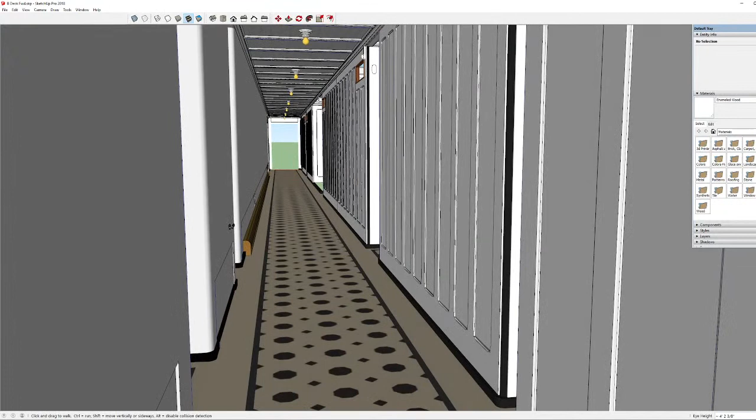One second. One second. I want to play my other music. I like to do this now. So, accordion. That was really loud. Okay. Hello again. I don't know if I have music playing in the background like last time. I'm gonna try because that was fun for me.

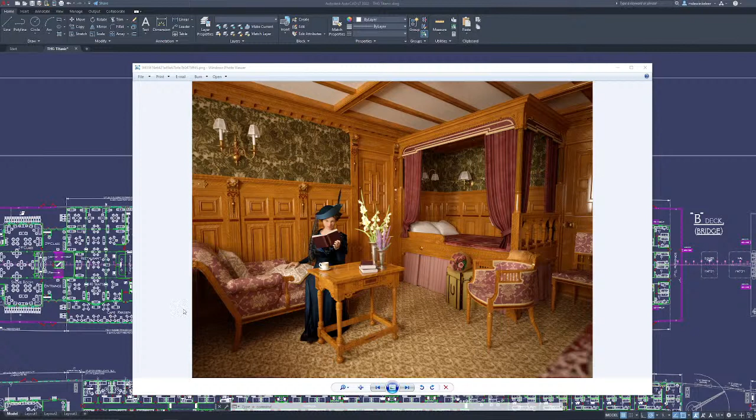And the things that Geo renders, which are amazing, if I could find at least one of them. Come on now! Well, this one I've shared a bunch of times. So this is B59. I don't like this song, I'm gonna skip it. This cabin is B59, the Old Dutch cabin. We've already changed some of the textures on the wall, but this is what Geo models. He models all these period cabins. He does the fancy things.

The point I'm trying to get to is that today I'm going to be working on these basic boring cabins. If you're a patron, sorry guys, you've seen me work on these before, and I'm just gonna make sure that they're pretty much ready to go, because the rest of the team is getting the forecastle and well deck all set. The files are going to be transferred to our drive from the modeling side to the engine side from all the modelers.

The scenes are set up to be given to Derek Vavir, who's the Unreal programmer. So everything here in the forecastle and the well deck area, I'm highlighting it like this, is going to be put into the engine soon and made to be interactive. And the next thing to be modeled is everything in this section right here. I'll zoom in a bit so you can see it's all these basic cabins.

And I think this is when the snowball effect is going to begin, because this is the area where you have the basic cabins, and these basic cabins and basic corridors are all the same. They're not like these fancy cabins that Geo makes. They're not a bunch of different styles. They're not Old Dutch versus Modern Dutch versus French versus Georgian styles in white or dark woods. They're just basic paneling, done this way throughout the entire ship, with the same furniture.

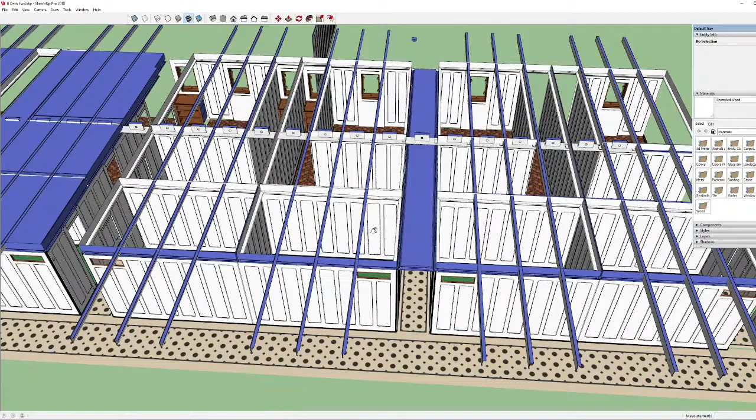So don't look at it like this. This is the basic SketchUp, awful looking, bare bones minimalist. This is as nasty as you can get. But this is what I have just to aid in planning it all out. So there's absolutely nothing nice about it.

Then there's Geo's version. Now I could basically do this too, where we render something to see what it will look like. Geo models his work for the sake of rendering. He uses SketchUp as well, and he renders it before it goes into Unreal, so that we can make sure that the textures match photographs.

So when he rendered this cabin, he then converted it to black and white, and we compared it with the black and white photo to see how closely it resembles it. And then we find some differences to try to modify the textures on the wall, the silk on the wall, for instance.

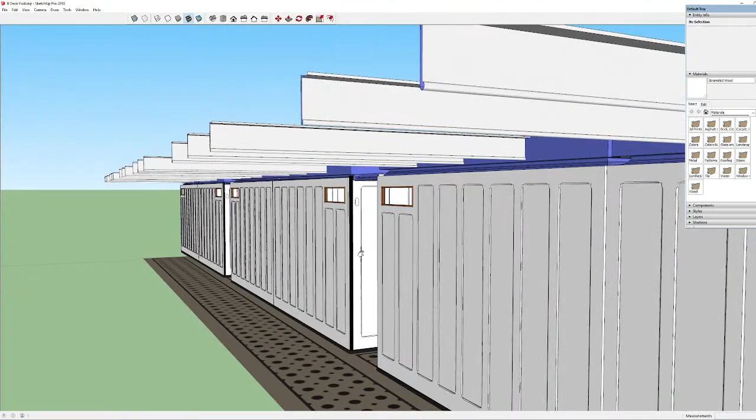So to answer the question, the lights right here are all done in the Unreal Engine. And coming out at the end of the year or beginning of next year, I'm not sure exactly when, is something everybody is talking about: Unreal Engine 5, which is going to allow us to put more detail into things. That has allowed me to get back into the picture with modeling some things, because if you joined the stream on Saturday, I was talking about how I am currently in the modeling program called SketchUp, and the majority of the team uses Maya.

Maya is what's utilized for transferring models to the game engine, Unreal Engine. Usually what has to happen to convert my models to the game engine is Kyle would take my models, put them into Maya after a conversion process, and then he would clean up my models, remove a lot of superfluous triangles and errors that would pop up in the conversion process, and get them ready to go. That process is probably still going to happen regardless, for optimization purposes. The same is going to happen with Geo's models.

When you see these renders right here, they're done for the purpose of rendering this lovely image. For instance, you see this inlaid design here on the table. You have the darker woods along the medium woods. The same with this little darker inlay here. I'm not saying anything negative about Geo's work because I do the exact same thing. Geo probably has modeled this into the wood itself with two different textures, but when we create the UV maps of the models, we wouldn't have to create lines. Let me demonstrate what he probably did.

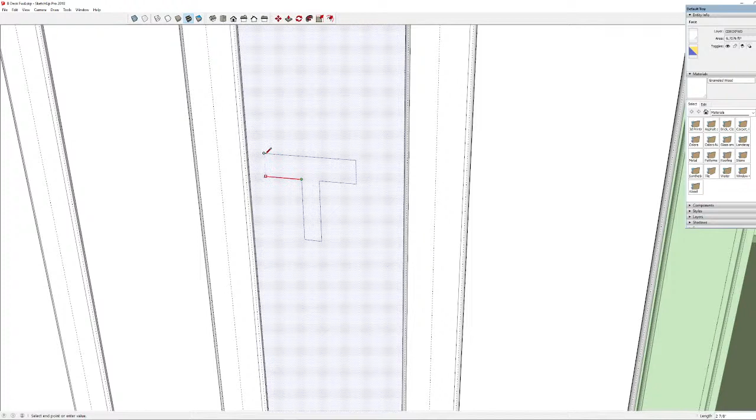What I would do is create that line right here. Imagine you want to write the T in Titanic. This is what we would do in SketchUp, and then we would color it in like that. But that's not technically the correct thing. We'd have to create it in the texture itself; this entire panel is one texture, and the T in Titanic would be part of the texture file. So SketchUp is not the best method for texturing. That's one of the downsides. So it's a good question.

There's a lot to go on, but what I'm doing today is checking the B deck forward area, because that's what's next after everything here. Like I said, all this is getting turned in, and the process is ahead for enginizing it finally, and they want to make sure that it gets correct for the alpha release, and then the next alpha release is beginning with these corridors and cabins. People are gonna get really bored with these cabins, since everything looks pretty much the same.

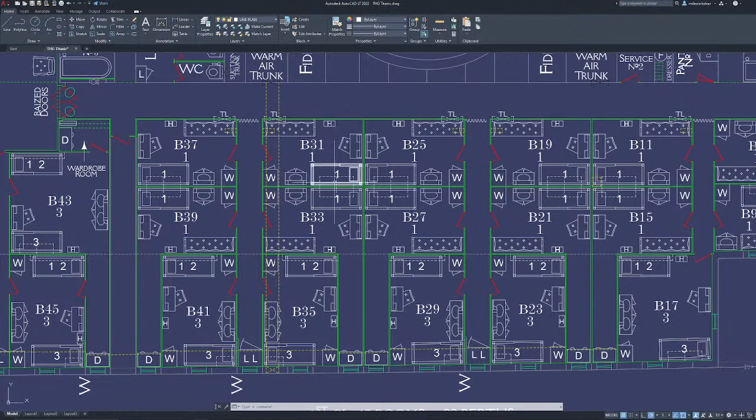If you can see here, Titanic has some really fabulous spaces, but they have a lot of repeating areas. So you have cabins here which are just wooden beds or brass beds, and they're all the same. They're all just white walls, and then you have cabins that are just green carpets or sometimes red carpets. So it's nothing that fancy, and they're just going to repeat constantly. Let me get into this and tell you what I'm doing. I got back into adding some more detail because I was able to do so because of Unreal 5.

I'm going to go into the chat quickly. I see carpet questions, which I like to answer, because we argue in our private research Discord about carpets. "I'm confused about carpet colors in the forward B-deck cabins. I hear they're either blue or green." Well, they're definitely green, and I believe this leafy color still. There are some blue ones that I have, but I'm not sure if we're keeping them or not. There's this blue carpet pattern, which we're using in places, which is different than the other carpet pattern, which you could recognize from Titanic, which comes in green and red.

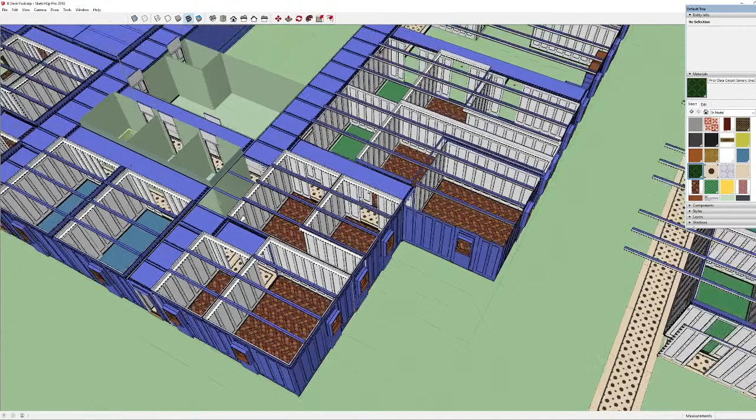I think I actually have it here. I'm gonna color it in really quickly. This one, which is a piece of it, is saved from Titanic supposedly. You can see it's different a little bit. You gotta look fast. And it's not made up, it's based off of another ship. That information for blue carpets comes from Britannic's specification guide, I think. It's always a back and forth with carpet colors, and sometimes beds. There's always a debate about which type of brass bed was used where. Is this one? This one I have to do.

Because there's several types of brass beds on Titanic. Okay, here's the new method for these panels. For a while, these panels were the bane of my existence, and I wish Kyle was here. We were always trying to find a method for them. They're going to be all over the ship. You've already seen them in some of the demos, and they're everywhere.

They're even in James Cameron's movie Titanic. You saw them in the Scotland Road, for example. But we have to find a good method for creating them. I thought at first we'd use a texture, but luckily Unreal Engine 5's coming out. So the best method is making them.

Kyle's bailing because he had to have his sleep. Hang on one second, let me just make sure by trying to text him. I'm pretty sure he's asleep. I'll give it to him.

But the best method for making these wall panels is to make them just like the real-life wall panels. Now, one interesting thing is you can see the dimensions for these wall panels, if you were here last time, in the ship joinery PDF that I sent a link to, which of course I won't be able to find off the top of my head. Maybe I can. Archive.org, and I'm gonna quickly find ship joinery.

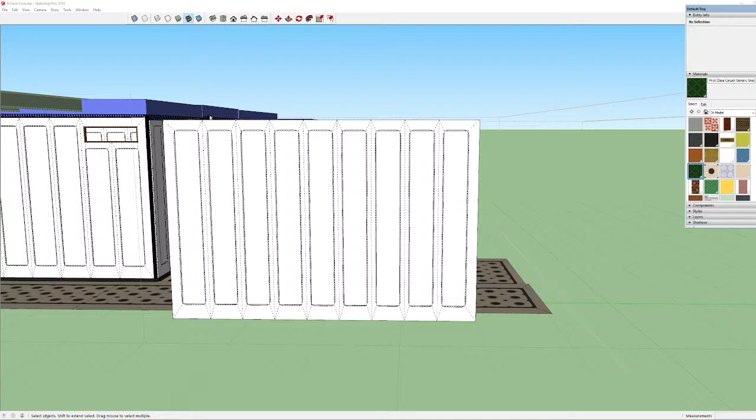There's also a page of it in Ship Joinery by Duckworth. So now we're going to the research side. Well, I almost opened right to it. There it is. That's what's all over the ship. This is what we're working with right here. So let's zoom in. I already have this, but I'm gonna show you guys. This is your basic bulkhead framing. If you want to learn anything else about it, here's how they did it. 5-ply wood, I guess.

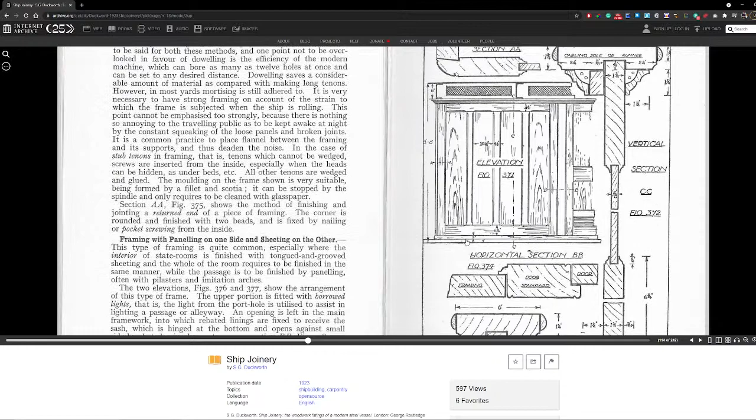This type of framing is quite common, especially where the interior of staterooms is finished with tongue and grooved sheeting, and the whole of the room requires to be finished in the same manner, while the passage is to be finished by paneling, often with pilasters and imitation arches. Oh, I turned the page. That sounds more like the fancy midships corridors. Figures 376 and 377. I haven't actually read this in a while.

Okay, I want us to be reading about figure 372. To complete the cornice, a nosing piece is planted on the runner. See section 372. Simple framing, that's what we're talking about. The piece of frame shown in elevation is figure 371. 375, 374, 372. That's the section. Well, it doesn't matter. The point is, we have this right here. More French. I'm sorry, I can't read French.

How is the deck pitch being modeled? SketchUp model looks flat. I believe you mean the shear of the ship, right here. Bevels for fore and aft framing. The curvature of the ship, the shear, which we are taking into account finally, because for the integration of the exterior it's vitally important, and Kyle's rather adamant about it, so it's going to occur.

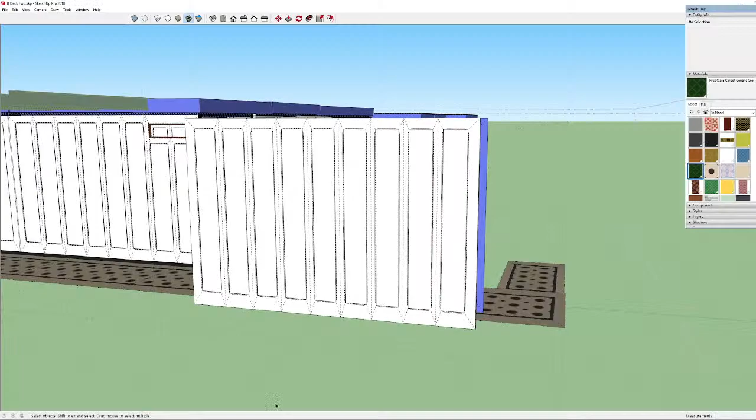So what's going to happen is, for the interiors that I create, such as these simple walls here, once they get handed over to somebody in Maya, and if you've watched one of Dominic's streams, he has made the entire deck plates using the iron plans, and he did them flat at first, and then he's going to add the shear to those, and then the shear is added to these panels.

Because everything is somewhat in Maya, it's much easier to do than it is in SketchUp, or so Kyle has told me. It can be done in simple areas. Now there are areas of the ship where the shear is less noticeable, and it's not really going to be done, such as amidships.

But if you're in the forward part of the bow, for example, that whole area has to be modeled with shear, such as under the forecastle deck. I'll scroll up here instead. This area here, you can tell, has extreme shear. It is an extreme angle, so it can't be modeled totally flat, as you can see right here. While there's certain other areas which are relatively level, such as amidships.

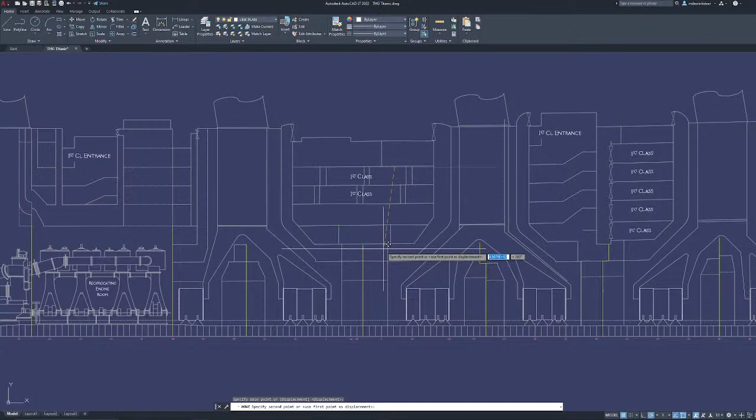As you can see, it's difficult to tell that there's hardly any shear, especially the lower you get amidships. That's why there is actually shear in our Scotland Road model, but because it's so low on the ship and it's amidships... this is E-deck right here. You can see this is the beginning of Scotland Road, basically right here. This is the middle of Scotland Road right here. Is this E-deck? D-deck? Yes.

Using just these plans that I made, you can see how minimal shear is. You only see shear really in long spaces anyway. That's one of the reasons why for a while I kept saying you don't need shear. If you're standing in the corridor of the Queen Mary, for instance, you can see shear in that ship. This is shear right here.

I don't know why there's a picture of like the Hindenburg over here, because this is airships.net. That's not the Hindenburg, but yeah, this is shear, and Titanic wouldn't have as extreme shear as this, we've all talked about, so we don't have to worry.

But we're not going to be adding shear to every cabin, because cabins are going to be just... Do I have a cabin that I can demonstrate this with? I haven't modeled a single thing I've talked about, but I think this one? No. Oh, maybe the old model.

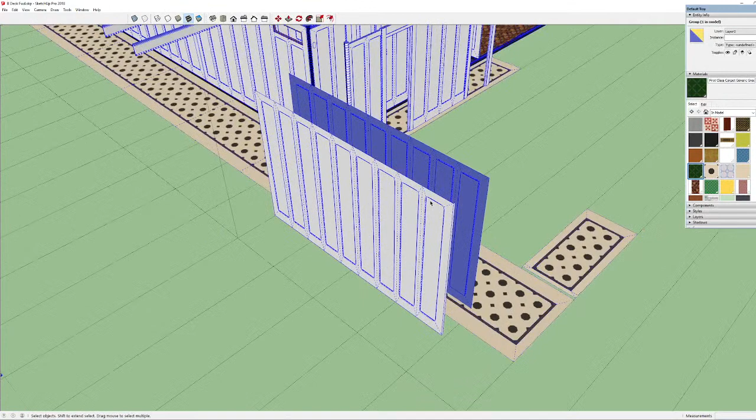So individual cabins will basically be picked up, and I think this is what we discussed about it. A cabin will be picked up and moved to fit with the shear. So things will be staggered to go with the shear that fits the corridor or the hull, unless it's an extreme case like underneath the forecastle or poop deck. So there's definitely shear involved with the plan. So now let me go back to this and explain what I'm about to do to fix this panel.

So the best way to fix these, which I've already fixed a lot of them, is to actually make them as if they are the real wall pieces, where we have wood on either side, because that's how they're done. Because you have a piece of wood, and you have thinner pieces. If you imagine a door frame, you have a rail and stiles, because that's what this is.

How did the carpet attach to the floor? asked Dark Moon 3D. Was there wooden flooring between it and the metal decking? The carpet was laid on the Litosilo. The Litosilo is the underlying material that was laid on top of the steel deck, and it was somewhat a new material. It's kind of like a plastic that was poured down onto the steel deck, and it was held in with clips that were bolted to the steel.

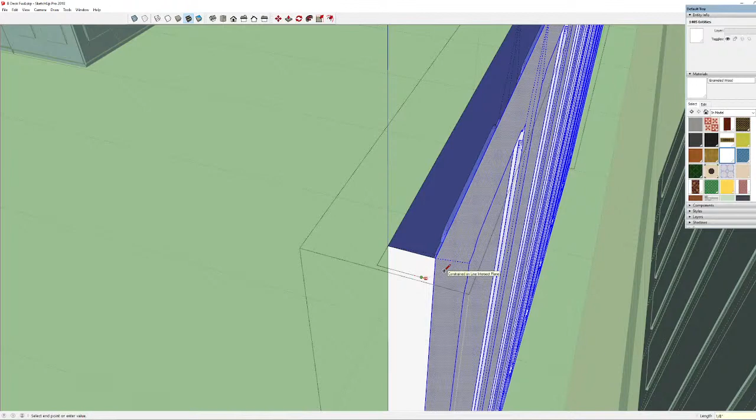So it seems to me that the carpet was more or less, and maybe if Kyle was here he could correct me on this, because he did a lot of research on Litosilo. He made some cutaways on Litosilo and carpeting. The carpeting seems to be just placed on. It might be stapled or nailed to the Litosilo in the corners, but you can see photographs of carpeting on Titanic, and it honestly doesn't look like it was put on in the best fashion.

In photographs of cabin B58, which is the Louis the 16th style cabin, you can see the carpeting kind of bunched up, and the room is mostly complete, or so they say, and that's why I believe that the carpeting was just placed, and that was considered finished.

This is a thin wall. This wall is an inch and a quarter. So to put that into perspective, it's thinner than my index finger and my middle finger, right there.

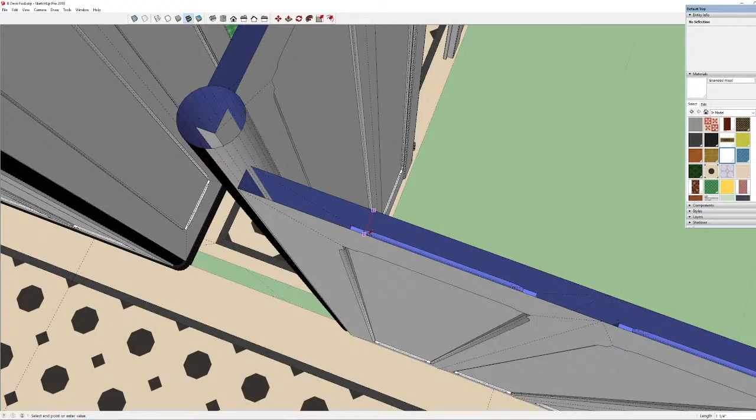And something is wrong. I gotta change it. I'm glad I realized it now. It should be the midpoint, and it's not in the midpoint. But I'll change it after I put that there. 15 feet. These should be the same. I'll show you with these over here.

Is there a door in that one? Yes, okay. So usually what I do is I take already finished components, bring them over, and then I change them up to be the next component I need until I build up. But if I already have something done, I'm not going to bother with it.

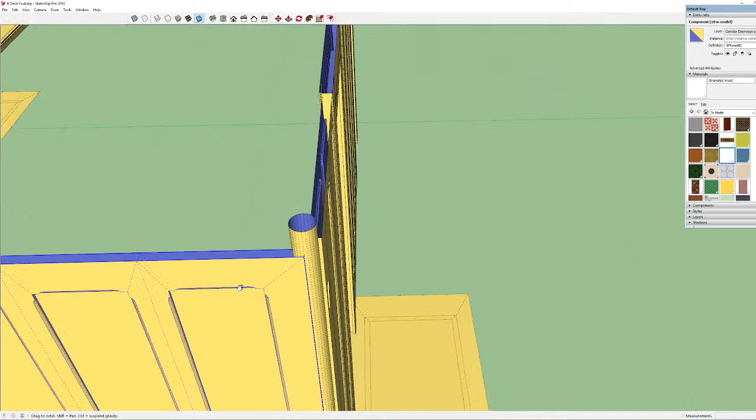We need to increase these panels by 2.5. Luckily I have a cheat sheet right here. Oh, I don't need the cheat sheet right here. But I can still do some math time. I've got 1, 2, 3, 4, 5, 6, 7, 8, 9 panels. Take this line, divide it by 9. You're going to see the insanity. Okay, a little under a fourth of an inch. Go in, take it all, and move it over by a fourth.

So the reason why I put off doing all these walls and why it takes forever is because, and I call these corridors and these panelings and these cabins the bane of my existence, it's just repetition and tedious work of doing it again and again and again,

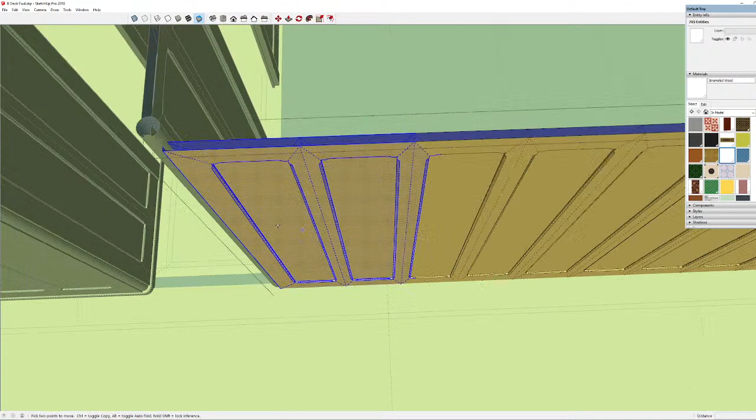and I don't know how the shop workers in Harland and Wolff and the joiners and the carpenters and everybody, I mean, I guess they were getting paid for this, but I can't believe that they did this. I imagine some of them did it on site on the ship to get things to fit perfectly, and I know for a fact that some things didn't fit perfectly on ship, and they had to, for lack of a better phrase, jerry-rig things to fit.

So there, that makes me more happy. What? Oh, I see. My thing's not even in the right spot anymore. Okay, that's better. Yeah, now that looks better. This needs to come over. Why aren't you in the model? What are you doing to me? You're giving me a hard time.

This is a deck cant, which I changed again because I realized that the deck cant has a cut through for the doors, which makes total sense, but I didn't notice it. Kyle noticed it. He's not here, but he noticed it. The deck cants are cut through for the doors to swing through. Of course they did, and of course Kyle noticed it. I didn't notice it, but what are you gonna do? Kyle's a genius.

What do I want to divide this by? 6. Not divide by, subtract by 6. I did it! I did math perfectly! Okay. And then I don't want to divide it by anything, I just want to move it over. Okay. Half the time I talk to you.

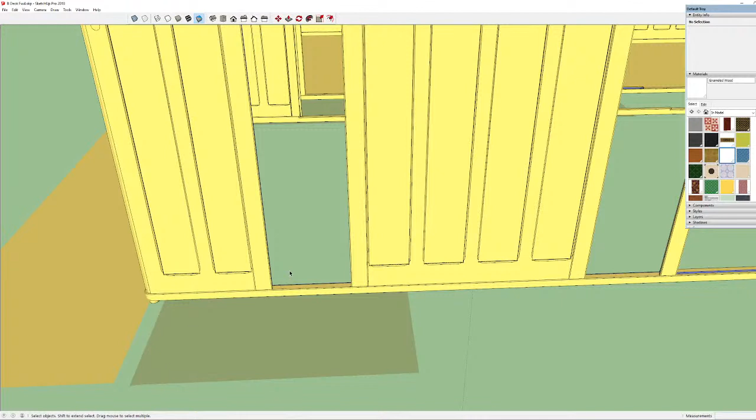Why do I use SketchUp? This is what I've come to learn and love and just be good with, and I stick with it, and I suck at everything else. So there's always been arguments to make me go to a different program, and it doesn't seem like it's worth the effort. I mean, not worth the effort, but it's tough to.

I don't do enough of the modeling these days. I do like basic modeling. I consider this basic modeling. I can do the setting up of where cabins and walls go and easy areas. I consider this easy areas. But for instance, Geo's already done these, but if I had to make the furniture for the private promenade, I would not be the one to do it, because I don't think SketchUp would be the best way to do it, and I would not be comfortable doing it.

I always say that I have a problem with doing curves and organic shapes, and furniture. And furniture often has organic shapes in Titanic's furniture, when you have curves of the legs on furniture and chairs, and not simple curves like on a round table. But do I have a Geo thing still up? Yes. Like scary, very scary.

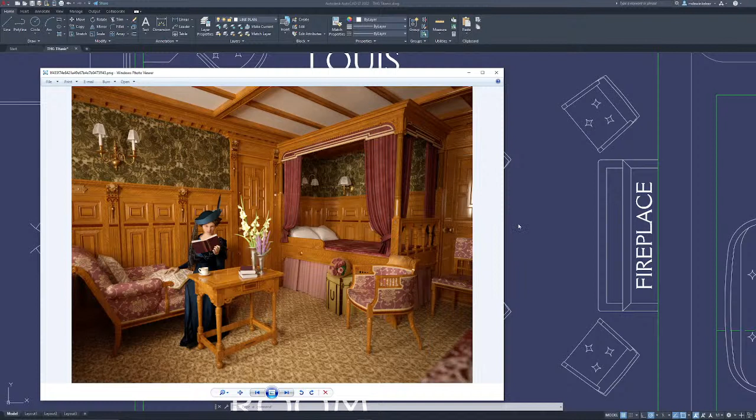There's a lot that's going to have to be changed for his models before they get put into the engine as well, and that's just an understanding. And that's before they go into Unreal Engine 5, which we're gonna go to, which someone asked as well.

And Titanic had watertight doors, which were vertical sliding doors. I believe her watertight doors counted to number 20. I think she had 25. I don't want to give everything away. 33. Why did I say 25? So she had 33 watertight doors. They were numbered on the ship.

So they were vertical sliding. They're horizontal and vertical. The majority were horizontal. There were only 12 that were vertically sliding. Sorry. The reason why I made these plans is so I could go to them quickly and be able to tell everybody information. And that's what I have it for.

Do you use the models for renders or from renders? We use the models to make renders, and then we're going to use the renders of the interiors to show everybody basically what the spaces need to look like in the engine. So when Derek gets to the interior of those first class rooms, Geo doesn't need to be there the entire time, telling him, make the lighting look this certain way.

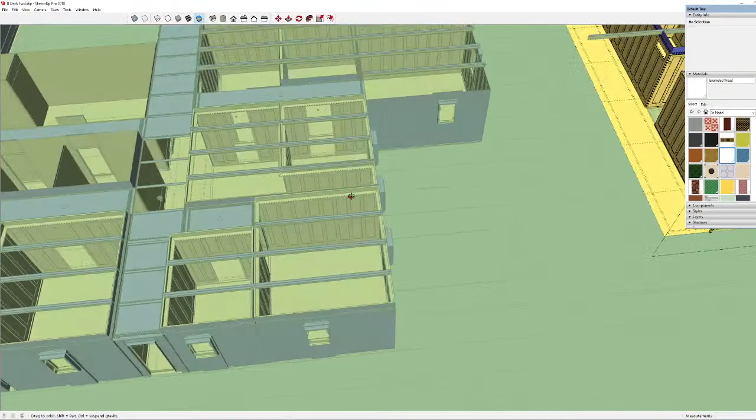We can just have the render already, and Derek can then try to make it match the render. That's why we have it. It's basically what I call a pre-visualization of what the space needs to look like. And that's not the right panel, I think. Oh, this one doesn't need a door. Well, I'll just make this unique.

I saw another question. How do you make sure your work doesn't get lost? Well, one of the things that we pay for is a cloud. I just got lost right there. We have a Google Drive for everything that we have, and we have model backups, research backups, plan backups, as many backups as possible. So we have it on our Google Workspace. So that's something we have.

And Jesse, thank you so much. "Looking good, Matt. Keep up the great work on the legendary ship." We're all trying our best. It's not just me. So yes, thank you, Jesse. We are. Excuse me as I take off my glasses and rub my eyes for a moment.

We have a lot of people doing a lot on this, and I'm gonna make this unique. No, I'm gonna actually delete that. I forgot. This needs to be completely. Oh, this already is unique. I need to do this.

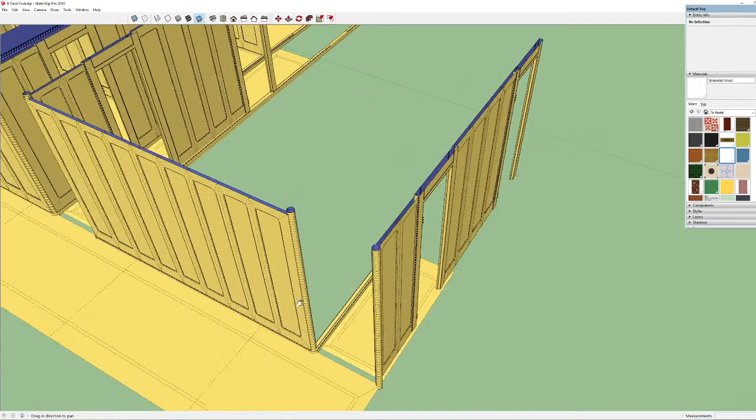Was James Cameron ever a part of the conversation back when you were looking for investors? Did you guys try reaching out to him? Did he respond? Did Bill mention anything about it to him? Is he aware of it? That's a loaded question, but there are some things that I can say and some things that I can't say.

I can say that yes, James Cameron is aware of Titanic Honor and Glory. James Cameron has seen Titanic Honor and Glory's videos. Dang it, I did it again. He's seen the real-time sinking. What else has he seen? He's seen the Britannic real-time sinking. He's seen the reception room flooding. He's commented on it. We've read his comments about it.

We've worked with him vicariously. Well, not vicariously. I mean, we have worked with him a few times to supply his documentary with the 20-year. What the heck was it called? James Cameron Goes Back to Titanic, and this is his second final word on the matter. I just raised my hands in the air like Dr. Zoidberg during that moment, because we provided footage for that documentary.

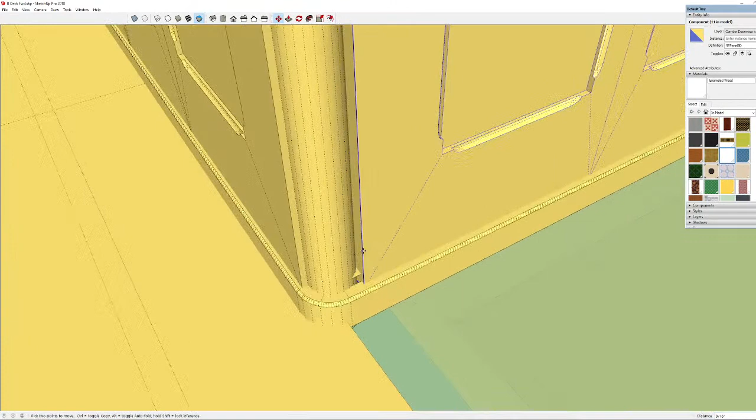And there was also an exhibition at the, what was it called? The Reagan Center. This is wrong. Hang on. There's an exhibition at the Reagan Library, excuse me, the Reagan Presidential Library in California. And it featured some of the ROV footage that he shot from the Turkish bath and the Marconi room, and we matched the footage that he took with our spaces, and it was presented alongside his ROV footage at the exhibition.

I think it still happens. I think it went to Washington D.C., I believe. And so you could look at Cameron's ROV footage, and then you could look to the right next to it, and you can see the footage sync up with the Honor and Glory footage that Kyle recorded, basically. So yeah, he knows about it, but there's a lot going on with all parties.

For one thing, James Cameron is busy doing James Cameron things, including Avatar 2, 3, 4, 5, 6. You gotta let him do what he's gotta do. You can't force people to invest, regardless of how interested they are in a subject. But yeah, it's cool enough that they know about it, or they talked about it, and they commented on it.

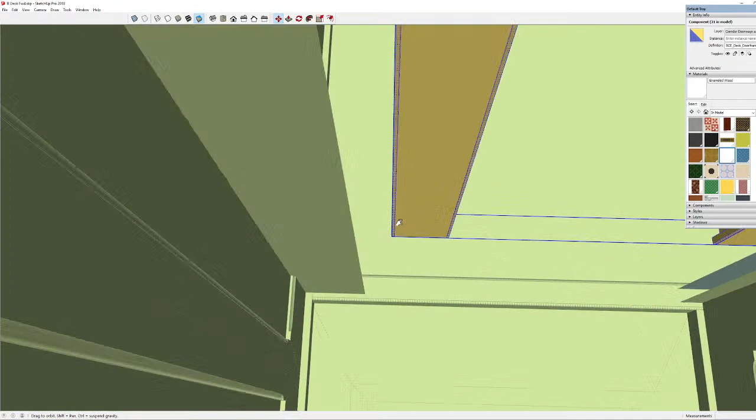I rewatched the movie in full the other night while I was working. Oh, I need to bring over just a door frame. Because I want to make a Titanic University video, spoiler alert, with something about the movie. I don't want to give anything else away, but I've always had appreciation for the movie. I don't want to ever bash the movie as some people do. It still holds up, and I still think it's spectacular, and he put his heart and soul into it. Excuse me, it's been a long day.

I don't own a TV, but yeah. Let's see. I'm only reading. There's a lot going on, but I only watch streams. I was watching someone's stream before I came on, and I was thinking, she's got all her streaming stuff in order. No wonder James was stressed.

So yeah. A 1/16 of an inch. Are you kidding me? Okay. I remade my door frames too, so I gotta. Oh wait, it's 50 feet and 6. Watch the door frame. Watch it. Okay. When I redid my door jambs, I redid my door frames. That's my most correct door frame so far. Kyle better not change it, saying, it's not as accurate as I would make it, I want to make it more accurate. And then I'll be like, okay, Kyle, go ahead. That was my Kyle impression, don't tell him I did that.

So, here we go. Let's see. Now I gotta look at my own plans right now. Zoom out. Zoom in. Luckily this was all spoiled already, I'm not worried about that. Big copyright notice. Okay. That goes right to the hull. Yes. At least I made Zeno laugh. Okay.

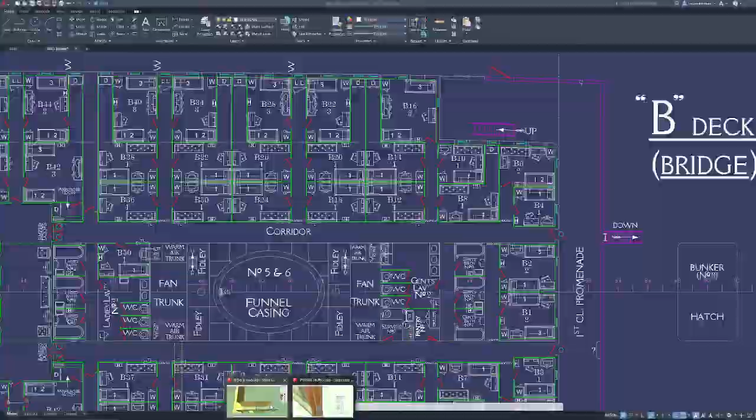I could have looked. I could have looked at my own model, which is what I'm doing. Nobody tell him. I forgot. Okay, 50 feet. 50.5 feet. So yeah, we're still... That's very interesting. We're just going over.

I'm prepping all these damn walls. I don't want to, but I have to, because we're getting there. I haven't finished these plans yet. That's the thing. As you can see right here, I got stuff floating on the side. I got engines that are unfinished. I got crap down here. I got empty linen rooms. I got missing stuff. I gotta finish some stuff.

And once I do finish these things, I do plan on having these be for sale. And I think people will appreciate them. So yeah, I'm hoping that I can finish them in time for the holiday season. The holiday season, everybody. That's my goal. So yes, where are we?

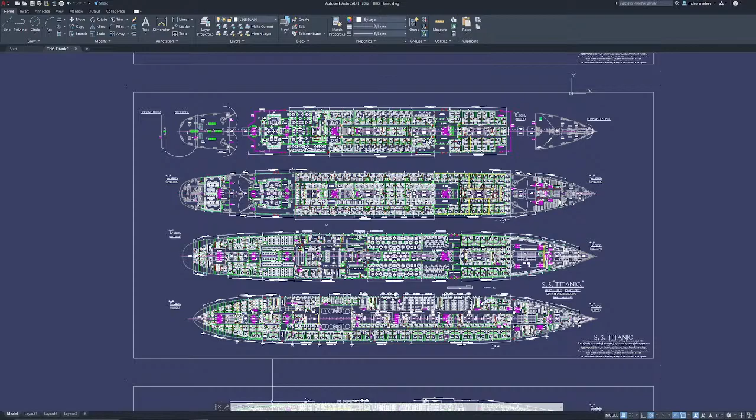It won't be as detailed as this. There's going to be hidden... There are some things that are just for reference. They're not going to be super sized, because they're going to be printed at 1/200th scale, and if they're digital, they're going to be also that scale. So you can't zoom in. I'm not sure yet. Where are we? I lost my place.

Oh, very good. Oh, this is a 13 panel wall. I don't have a 13 panel wall yet. This is a 9 panel, right? 1, 2, 3, 4, 5, 6, 7, 8, 9. Yeah. I guess I'll just convert this one to be a 9 panel wall. Oh, this is a 9 panel. The 13 panel, this one. Okay, this one's easy. This one I'm gonna keep as is.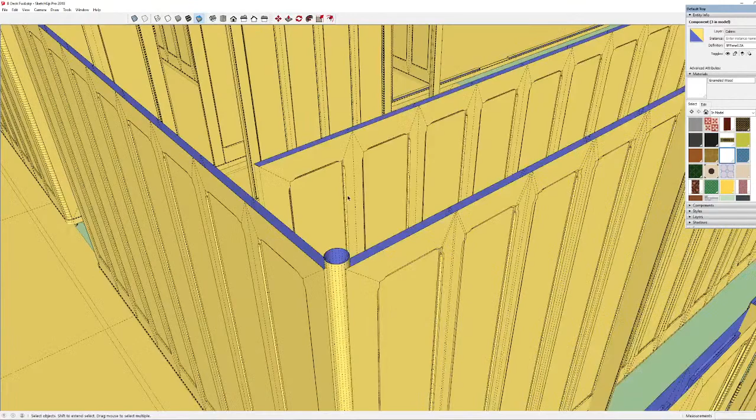In the alpha, you will not be able to go to the boat deck. Will you see the boat deck? I think you will be able... Technically, no. No, you won't. I don't think you'll be able to see the boat deck. That's the best way I can put it. You will be able to look up to where the boat deck is, but you won't see the boat deck yet.

There's some things that we are planning for. Remember, Titanic will be sitting in Belfast in this alpha, just like in Demo 3. But it takes place before Demo 3. That's all I'll say. So there's an interesting timeline.

Will there be multiplayer in THG? That's very expensive. Everybody needs to give a lot more super chats, buy a lot more ships, and we need to have a lot more patrons, because multiplayer involves servers and lots of things. I wish, it'd be fun. Oh, Shane, thank you. I'll read yours in a second.

But there is a Titanic... What is that Titanic multiplayer experience that's been around for like 10 years now, that you can just explore and have fun with? Oh gosh. Oh, it was so much fun. What was it? If someone can remind me. It was a very simple model of Titanic, and that's why you were able to do it. But yeah, Shane, thank you.

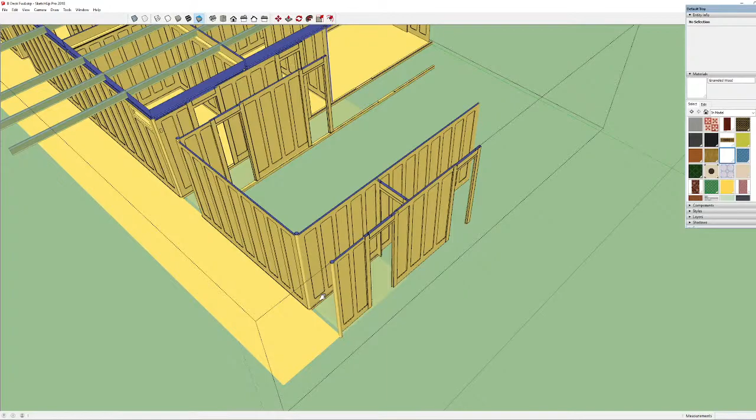Eager to explore all these boring cabins that looked more or less the same in the alpha. Does the forward B deck section contain a stewardess room? No, it doesn't. The forward B deck does not contain a stewardess room. They gave it a cabin. This is usually where a stewardess cabin would be.

I think it was Titanic Chat. I think Jimmy's right. Titanic Chat or Titanic Voyage or something. Roblox was not around yet. It was like an RPG or something. But it eventually could sink. And one time there was a bunch of people there.

Yeah, this is where they would have a stewardess cabin on A deck. But on B deck, they made it into an inner cabin. So it was a very interesting place. Very tight spot. A stewardess's cabin would be more or less the same as one of these cabins, paneling wise. I forget if the auction catalog said it had carpeting or not. Some had carpeting, I think, like the nicer ones on C deck. C deck was considered the nicest deck.

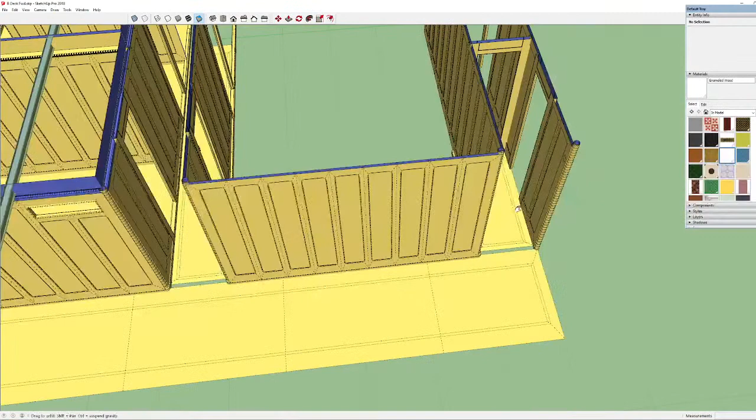Some stewardesses had heaters on C deck because, like I said, C deck is the wealthiest deck. Even on Titanic, even though they had the cabins which extended to the outboard of the ship, C deck is the nicest deck, I guess you could say. The crew there were treated as nicely as the rest of the passengers. That's where the maids and valets saloon is. The barbershop's there.

That's where the fanciest cabins were, as stated today in the critically acclaimed video, Titanic's fanciest cabin. Just kidding. Let's see. Oh, this could make me mad. That could make me mad.

15 feet. Yeah, well, I made it work with that one. Let's see.

Will these plans you're working on be given away to patrons? I have considered giving away test prints to patrons. I did a while ago, actually, in the beginning, give A5 size papers to certain patrons. The ones that had the prints, I printed out basically on just printer paper, little snippets of the plans when

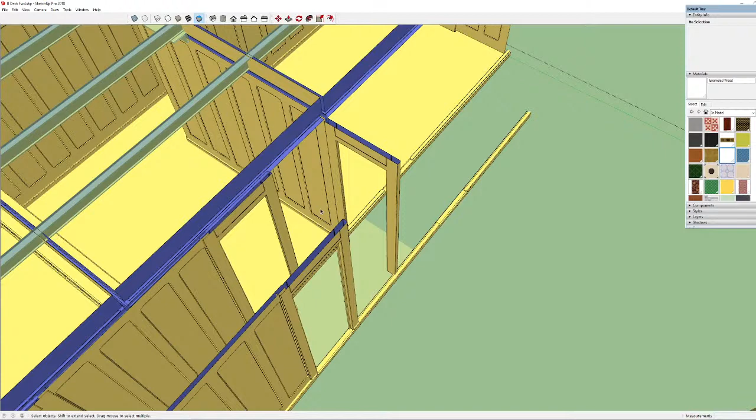I was printing areas to see what it would look like, the line weights, and see if I added too much detail that would be printed or not. And when I sent out 8.5 by 11 prints to people, one month I sent that with them as well, and I had some feedback that it was fun.

Matt, how did you measure all the first class areas in C deck? I want to make an interior scale model. It's very difficult. I'm gonna get into a long ramble about that. Let me scroll out to C deck, for instance. So how do you measure all the areas on C deck?

Well, it starts with the... Do I have it available? I'm gonna hide everything, but turn off the current layer. Watch this. Line text. No doors. No dash lines. None of that. Okay, we'll keep that.

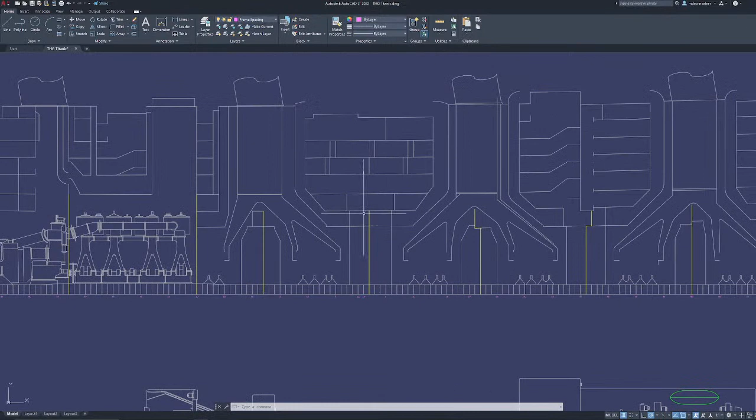And they start directly in the middle of the ship, right here, with 1A and 1F. 1A stands for 1 aft, 1F stands for 1 forward, and they work all their way to as far forward and as far aft as there were frames. And there was a certain distance between them, and that's how I measure the ship.

Most plans tell them, even modern plans. Bruce Beveridge's plan says it. I make sure that my plan will say that. They say the average distance between each frame is 36 inches or 3 feet. So basing it off of that, you can look at any other plan and measure rough estimates to see that certain areas were 9 feet or 3 frames wide, or a single bathroom, for instance, was roughly 3 feet wide.

Let's go to C deck and give you a better example. Unless you want to get really detailed and go to the source. I'm going to give you a website. You can go to the National Museums of Northern Ireland, go to their collections, and get the iron plans of Titanic. As many as they have, they don't have all of them. We're still missing some of the ship.

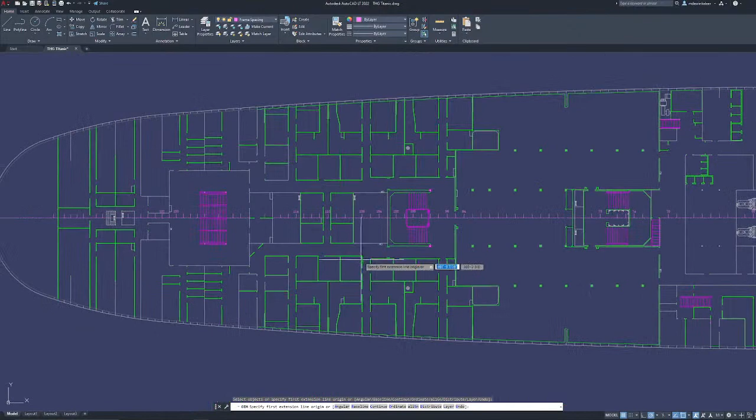This looks fun like this. I can show you what this ship looks like, because this is not showing any detail, or at least it's showing detail that I don't mind showing, because it's just where the walls are. And you can get the iron plans of the ship, and you can try to desperately interpret those to make your deck plans. I'll open up the B deck iron plan, because we're working on B deck so much.

So this is fun to read. This is B deck's iron plan right here, and as you can see, I already have a headache just looking at it, because it's always quite awful. And so this is what you have to work with. And of course, it doesn't show you where cabins are.

It just shows you where the ironwork is. And here you can see where all the beams are, these dashed lines, and it shows you the length of the beams and the number. So there's two beams that make up this long length right here that goes across. You have two of them, and they're 35 feet 2 inches.

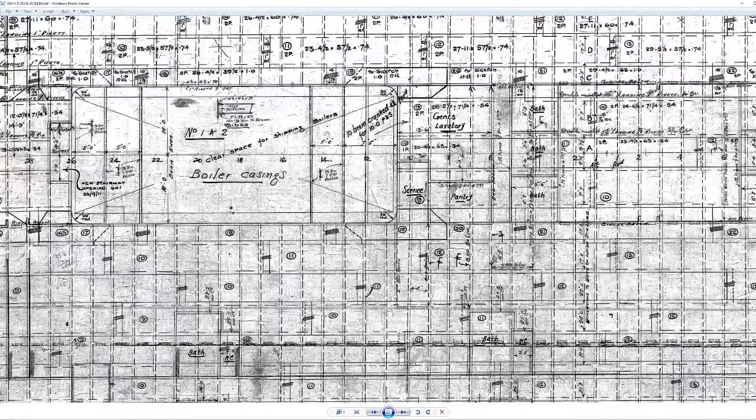It just goes right to here, I'm sorry, because obviously there's a web below. I got to make sure I got that, and then you have 20 feet right here. So if you add 35 feet 2 inches plus 35 feet 2 inches, because you have two of them, 35 and 35 is 70, right? And then you add the 20 feet, which we know we have right here, 10 feet plus 10 feet.

So that's 35 plus 35 plus 10 plus 10. That's 70 plus 20, which is 90. So you can see right here that B deck is 90 feet 4 inches wide. So it's fun to read their measurements and how they did it. You can see that you have one long beam right here where there's no casing, and you got one that's 90 feet 3.5.

And you have that for most of the ship here. You got an 89. You see where the ship is slowly starting to taper in towards the bow right here, because you got 90 feet 3.5, and you suddenly got 89 feet and a half. And then you got 90, well, I guess it tapers back out. I don't know. Very confusing.

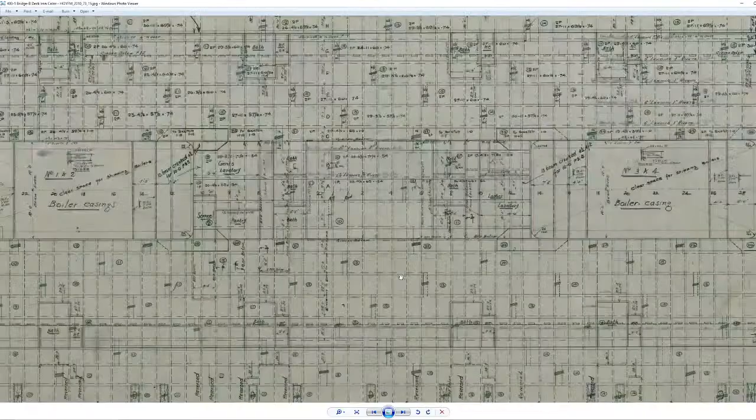There's all sorts of details that you gotta be able to interpret. Like right here, here's a note that's specifically for Titanic, I guess, versus Olympic. Beam knees, 72 plates, 80. Because you see 401. It'd be good if this was in color, and here's a better version of the plan. If it was in color, then we'd be able to read the changes in the notes.

So yes, you can see here's blue. So these plans aren't just in black and white; they're in color when you get them. Like this one right here. Look at these windows. They painted the windows.

Someone on the Titanic Honor and Glory fan page on Facebook asked what plans we use to make the ship. And I didn't want to answer. I wanted to see what everyone said, because I wanted to see if people took it seriously or not. Some people were rude and said Titanic plans, and I was ready to say, well, there are no Titanic plans. But we use as many plans as we possibly can for all ships.

This is, as you can see, technically Titanic, but it's mainly Olympic, 400 to 401. Here's Titanic, Olympic, but there's Titanic specific notes involved in it right here, 401. T-bars only. Or there's T-bars for here. There's the doors moved right here, which doesn't actually make any sense. Well, here's Britannic. We use Britannic plans. But yes, that's what happens, and we use them as much as possible.

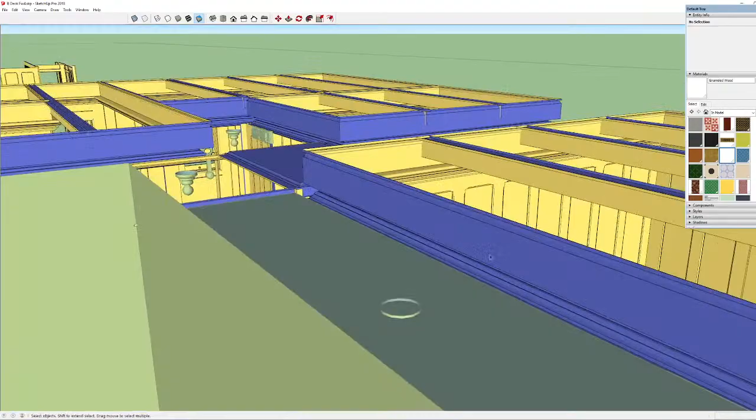We will see a lot of beams, because the beams right here are the beams that I was doing the math for, that we were saying were 90 feet in length, because they didn't always hide the beams, especially in these basic, quote-unquote boring cabins. They used them as part of the decor somewhat.

They try to hide them by, that's an old beam. What in the world? This is not a new beam. Where am I? What world is this? Oh yeah, here's the beam. This is the beam. This is not right either. Okay, oh, this makes sense. So yeah, you have your beam right in the ceiling.

They left a lot of structural elements above exposed. It wasn't that uncommon. The steel above is just steel above. We're used to seeing Titanic, and the common person just assumes every cabin looked like Cal and Rose's cabin amidship like this, but the average Titanic cabin, you're going to find out, was something like this.

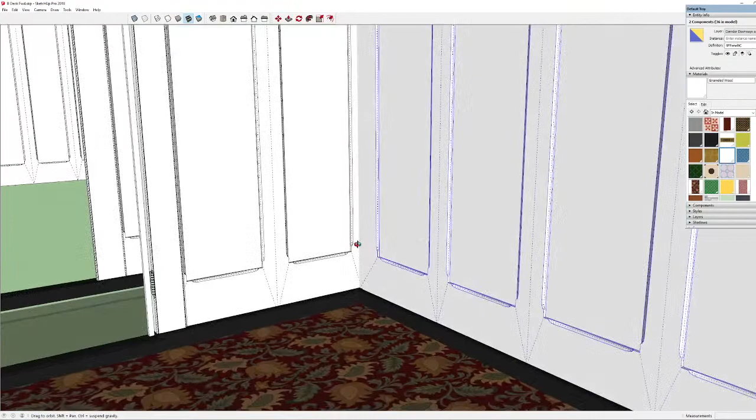Ode to Joy. Is this the same playlist I played last time? I need to find better free music. Okay. Alright. That scared me. There we go. That's much better. Yeah, that's much better. Okay.

Were there carpets in the corridors too? We can't be 100% certain about that. I don't think there were carpets in most of the corridors in first class. I think just in the fancy midship corridors that connected to cabins like this on B and C deck. I don't think there were carpets in these corridors, perhaps.

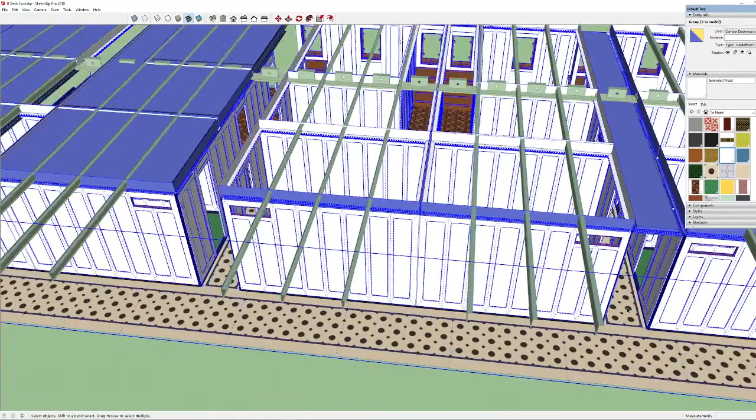Oh, Jesse, thank you. Give me access to unlimited stimulants and Celine Dion playing in the background, and I'll have the development completed in 2 weeks. You sound like Geo, but I'll leave that as that. Same songs for sure? Yeah, I think so. I'll work on that eventually. I don't want to play anything that will get me in trouble with the law or the YouTube man.

Let me show you. Speaking of things that are plain and dull. Thank you, Jesse. We're trying to take our time to get it right, but also get it done. Why is it like this now? This can't be right. Okay.

Yeah, I looked for specifically. Well, I could find like classical music, and that's fine. I will do that next time, Jimmy. Thank you. I'm stealing stuff.

Oh, this is a good question. Will the stern roll over in the final game? So, yeah, people want to know, will the ship sink? Or how will the ship sink?

Oh, play some ocean waves. Very peaceful. When I like to meditate, back when I was being responsible and taking care of myself, that's what I like to listen to.

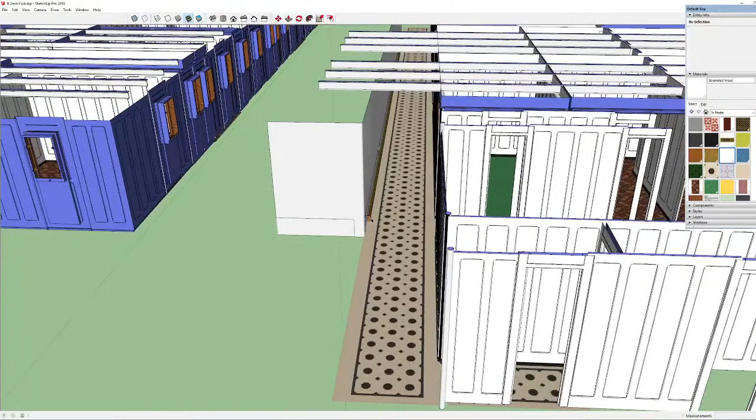But yeah, we all hope the ship will sink, which is really weird to say. It sounds weird. What is that doing? Okay. However, we just want to make sure that we have our ship ready to go first. We don't want to go crazy. We don't want to overpromise things. It's easy to overpromise and then underdeliver.

I'm having issues with this new thing. Well, that's not right either.

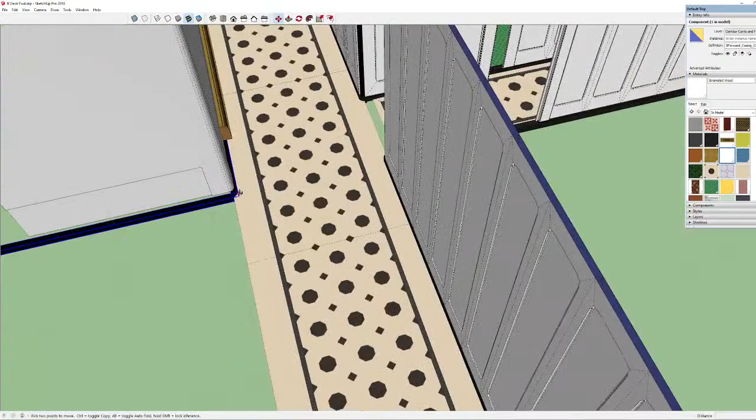If you found out some of your areas were inaccurate, what would you do? Asked Logan again. Well, it depends on what the area is and how big the inaccuracy would be. For example, Logan, I know of a minor inaccuracy down in the reception room on D deck, which is where we started everything, back when we did our very first demo.

I don't mean this in a negative way, but none of you would ever notice. I didn't notice. I didn't know it was an error. There's things that were hard to even figure out back then. But the error in question is actually kind of apropos: the baseboard heaters in the reception room are too tall, so they're out of proportion with the rest of the room.

And the person who discovered this was Ken Marshall when he was looking through the reception room, and of course he would. So he pointed it out, and now I can't not see that the heaters in the reception room are way too stinking tall. Of course they're too tall. How did I not notice that I made them too tall? They look comically tall, and it's just so obvious.

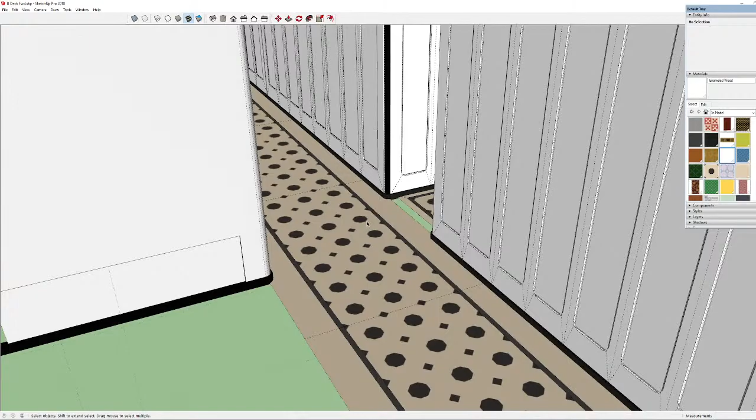But if we discovered a huge epic change, such as the furniture in the reception room was blue, I don't know, then we'd retexture it and we'd send out a patch. I think that's how we'd fix these things.

It's something that we decided upon, that we've spent so long striving for accuracy. We kept saying we're gonna take our time to get the ship done right. So if we suddenly want to just speed through this, I almost swore, then what's the point? We got to make sure that we're doing it right regardless. So if we find a little error, we'll come back to it, and I think I have a little error right now.

Oh no, I gotta bend my ship in. So let's see. As you move tweak objects, do they lock to other objects? No, not in SketchUp. I think they somewhat do in Unreal. Oh, I just see my columns there, my pillars. In SketchUp, I do have like snap lock, and you can see I have angle in. So I have a form of it, and it snaps onto the axis.

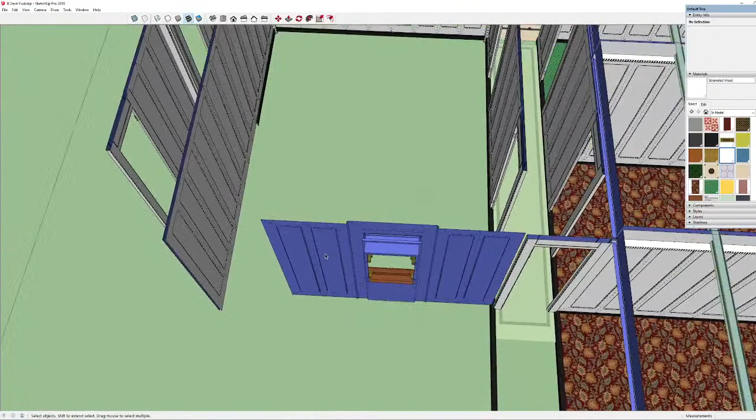Yeah, some artistic license comes in a lot. Bill Sauder calls it set dressing. And there comes a time where we have to just call it a day and say, all right, to our best ability, to our knowledge, the ship looked like this. We have a best guess, an educated guess. And this is what it is, and we're going to let you guys know why it's like this. We're not just gonna leave you in the dark about it. We're going to tell you via our website, via our log entries, etc.

But quite often we have to question why the Edwardians picked something to make the ship look the way they did, because sometimes Titanic looks disgusting on the inside. Quite often, Titanic looks less Titanic than you want it to look.

I'm sorry if I'm missing some questions. You don't have presets for certain global elements like heaters, floors, certain walls, etc.? We definitely do, but I think I still have a folder open. The heater in question, I'll show you really quickly because I now made such a big deal about it, is not really a preset. It is not really a standard heater, and here it is right now. You can see it is part of the bulkhead, part of the wall itself. And when it comes to this D-deck reception room, great, I'm quoted as saying that now.

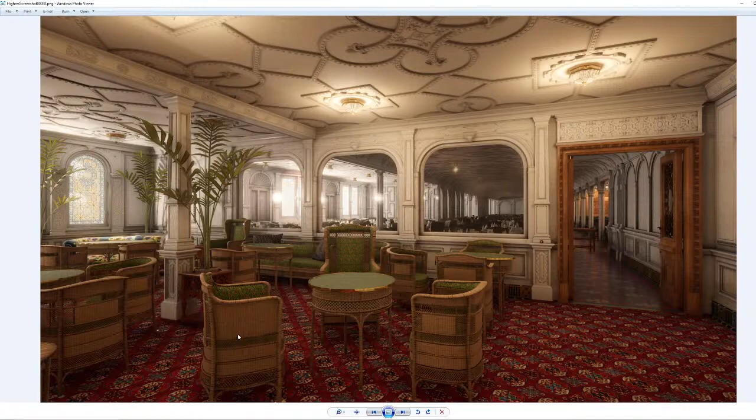We picked the opulent grand places, but because of that, we were still, for lack of a better phrase, novices when it came to making anything, and researching things too. We learned a lot after the fact. So, yes, down here you can see this really tall heater grill, which to me is so obnoxiously tall. It's too high, and that's what Ken noticed. It needs to be changed.

And you can see things that are just like, Kyle, what happened here in your Unreal-ing? That can't be unseen. Why are these two panels just out of whack? What did you do here?

And now also this whole area, I keep losing where the Unreal 5 image went. We put this stuff in Unreal 5 just to see what it would look like really quickly, and I have the screenshots of it, but I don't know where I put them. Which sounds like I'm trolling or teasing, but I swear it's a thing, and I don't know where I put them.

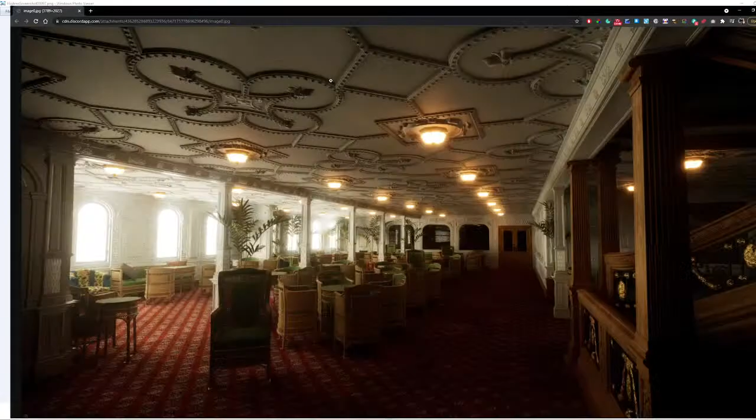Well, now I'm not going to show any screenshots of the thing. There. Well, look at this. So we like how the white is looking. Some of the textures still need changing, but you'll see that it's much nicer in my opinion. I think this was just placed. I don't think Derek's here, I think he's still working. But this was just placed into Unreal 5 to test it right away, and all they did was turn on the lighting outside, and that's it. You can obviously see there are still some problems with reflection. But where's another one?

Well, speaking of the prettiest cabin on board the ship, B64. That's Empire, isn't it? I believe it is. This is B64 right here. I'm colorblind, so I have to show you the actual image. And one more Unreal image. Maybe not that one. Let's try this. Do I like this one? Whoops, sorry everybody. It's not so bad. Oh yeah, they modified the lighting a little bit. So yes, this is just a quick test in Unreal 5, and I do believe this ship will sink.

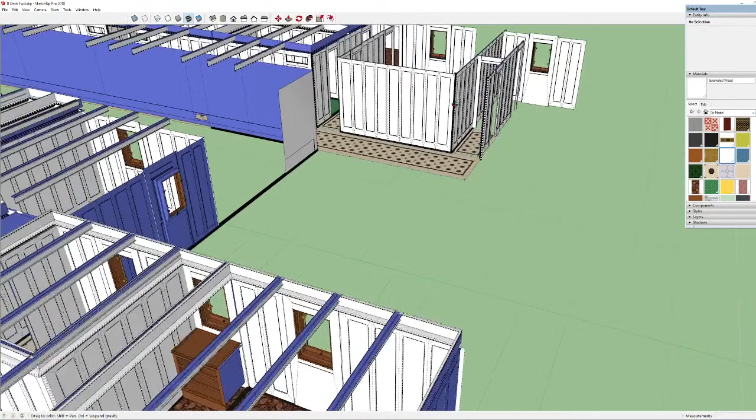Or how about a flashlight? The power goes off at night. We love the idea of flashlights. We have talked about flashlights, definitely. Most definitely. Torches. I believe I found an advertisement for a specific torch in a 1914 catalog, which had the... well, you definitely still want a torch or a flashlight when you're on board the ship, because there's lights, but if you really want to look at something close, especially when you get to the lower decks, even just D deck in areas.

Back to my plans. There's areas where you have sparse light bulbs. Now I have the hiccups. There's sparse lighting conditions, and we want to make sure we have the accurate lighting. We don't want to have Hollywood lighting. We don't want to have overly dramatic lighting like James Cameron. Sorry, but his lighting was like that for a reason, because it's a Hollywood motion picture, and you have to be able to see what's on screen.

And so if you need to go into this room right here, which has just one light bulb, you might need to take out your torch or your flashlight and be able to see more around it. I don't know what this room is. I don't want to tell you guys what this little space is right here, which even goes under the stairs, or this little space right here, which I've added, which is not in a lot of plans.

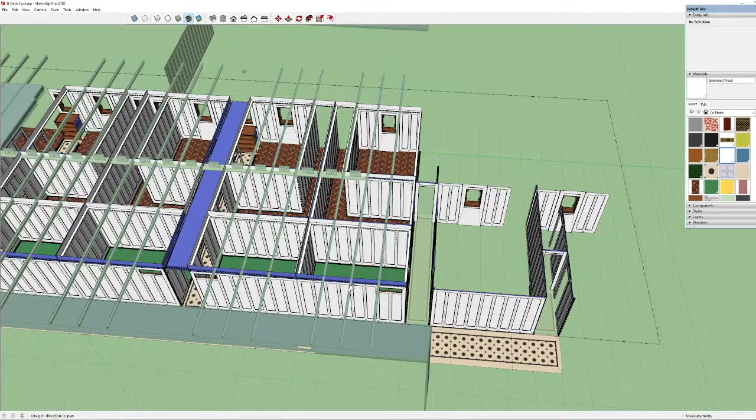I did just see another question by SC133A. Do you plan to add imperfections on anything to increase realism? Yes, most definitely, because I'm quoted as saying that Titanic was disgusting inside, and I will also be quoted as saying Titanic wasn't perfect inside. And I told a little story about, I definitely need Kyle here, because Kyle can tell stories while I model, because I can't chew gum and walk at the same time.

Someone also asked earlier about the carpeting, and here we have two types of carpeting. I have like four types of carpeting. Ooh, I have McBride. This carpeting is called McBride. That's on E deck. But the carpeting is just placed on top of linoleum, a plasticky material which is poured on while hot on top of the steel decking. I'm going to find an archival photo for you all.

One of the biggest imperfections that I've seen on Titanic herself in photographs is that her carpeting is not perfectly smooth. I mean, if a professional carpeting company came in and laid carpeting down in your home like this, somebody would probably say, "Hey, what's up with this? It's all lumpy. What's going on? It's all lumpy bumpy. Look at this. It's got lumps and frumps and grumps. Redo it." And you've got huge seams going across the carpet.

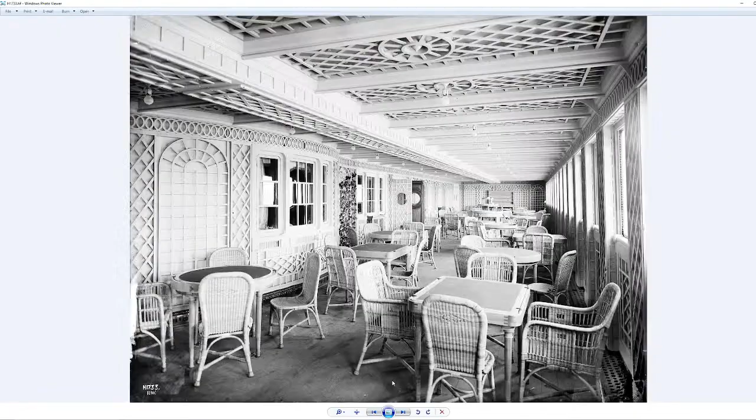This is, I believe, and this isn't a Titanic only thing. I've seen this on Olympic. I've seen this on other ships which weren't Olympic class. I've seen this not on just Harland and Wolff built ships. This is almost like the standard carpet laying practice of the day. So yeah, you have to look at these ships and see that it was a little different in standards back then.

You have exposed piping in a first class cabin, and everyone's mind goes insane. They think that this can't be first class. We get that all the time still in Facebook comments, and it's fun to watch people go like, no, this can't be Titanic. This can't be first class. And you say, yeah, that's a first class cabin. But it's really not a first class cabin. I like to argue that because, like, the cabin I'm talking about is here.

I'll show you guys all that right now. Where is the cabin? I'm gonna tear down the ship and start again. The cabin I'm talking about is this cabin. Simple. It's on D deck. They see this cabin, and you tell them this is a first class cabin, and they think, what? That can't be a first class cabin. Look at it. It has pipes everywhere. It looks ugly. How is this first class?

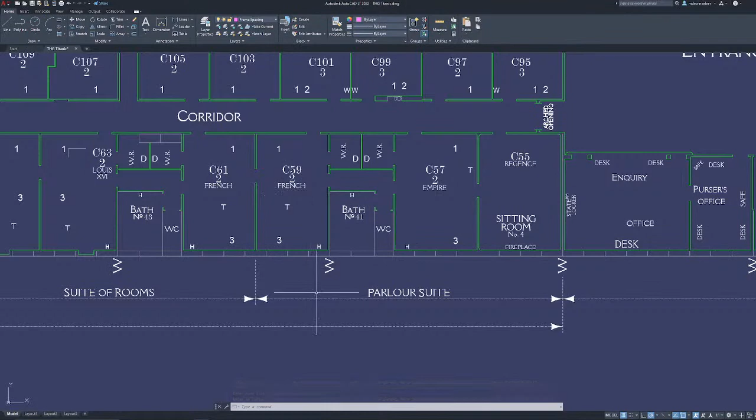So that bed is only for, what the heck is this? That cabin is only for 1 person. Most of the beds are only for one person on Titanic, regardless of the width of the bed. So even though it has 2 pillows, or it looks like it's a double bed, it's still technically a single person bed, just like any of these beds. They're all just single person beds, and messed up carpet right there. But they are a little bit smaller. So that's why you have those in the suites as well.

And I've seen several of these beds in person a couple times, and they're small. They're pretty small. I could fit in the bed in this direction. I wouldn't have a problem width-wise, but I'm tall. I don't think I'd be able to fit in the bed like this.

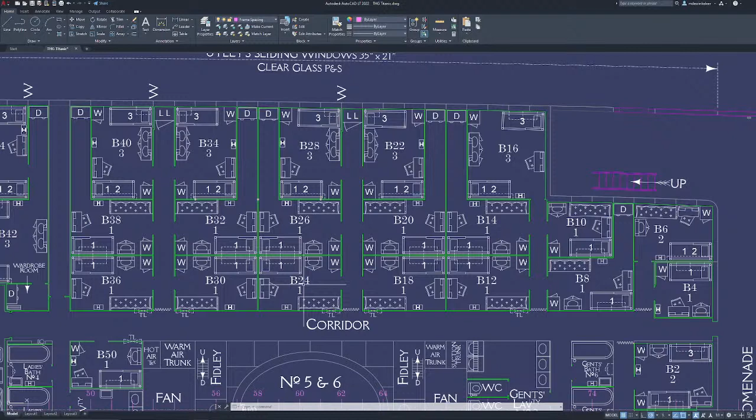They all have one bed, but they can sometimes double, and only in the busy season will they usually allow this for sofa berths. So these are sofa berths, and this is usually a single person cabin, but you can say, hey, White Star Line, I wanna book a passage on your ship. It's the season. You're busy? Oh yeah, we're busy. Can you do an inside cabin with a sofa berth? I don't have to pay as much, do I? Oh yeah, that's fine. It'll be just the cost of a seasonal ticket. Okay, thank you. And then you pay for that.

And you have the same thing with A-deck cabins, because they were also seasonal berths with their settees as well, sofa berths. And then you had certain cabins like on C deck, which had some overhead berths, the Pullman bunks, which I think I had a photo of. These guys right here. These bunks which drop down from the ceiling, which you can see in demo 3, the last one with Robin. This is a Pullman berth. It folds up and folds down.

In certain rooms, it was all the time. In certain rooms, they would put it in, depending on if it was the high season, being summertime. What's this? I'm glad I turned off some layers. So if it was the high season, you'd call and be like, hey, White Star Line, I need to put 3 people in, and they'd put the berth in like right here. And this is it right there. So that's the lesson on the Pullman berths.

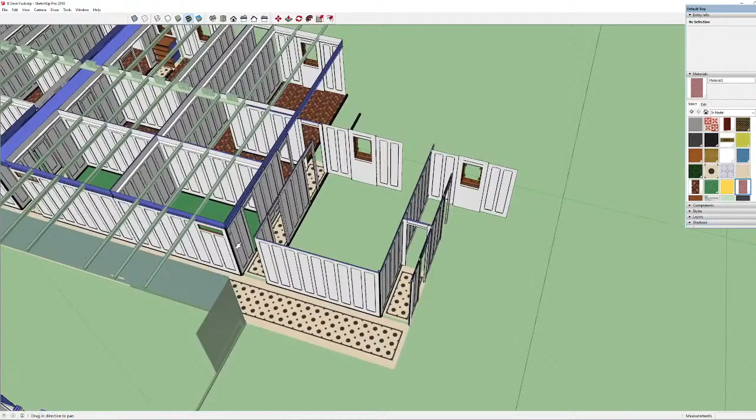So for berth, the extra furniture was the berth.

Separate rooms for your partner sounds like a dream. Well, the engines reciprocate. I hope they do. That's pretty rude if they don't. Oh, hi, Betsy. Welcome again.

Edith Russell said she had 3 staterooms on A deck. Does documentation support that? Does it even make sense? Okay. Lots of love to Edith Rosenbaum Russell, may she rest in peace. She's a little bit of a sensationalist from everything I've read and learned about her. But she had, what I read recently, I think Dan Klistorner told us this. I'm not sure, but

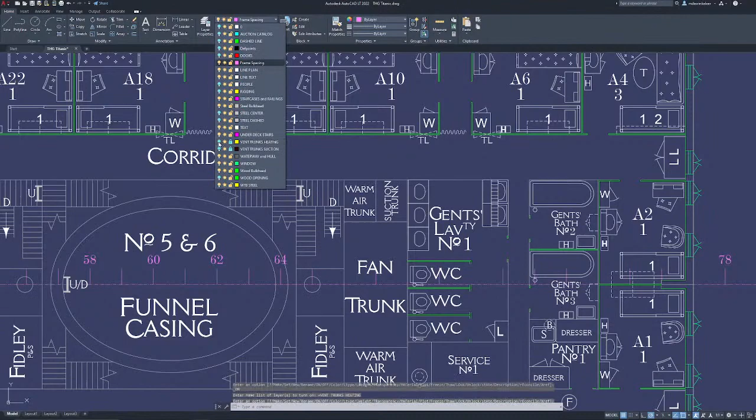What were the warm air trunks for? Oh, right here? Let me turn on some. I don't think I have them. Oh, maybe I do. No, I don't have them on A deck. The warm air trunks are exactly what you think they're for.

They deliver warm air, not hot air, warm air to passenger areas. So basically you have all these vents on the top of the houses. These ventilators, which you look at a photograph of Titanic and you see these big vents around the funnels. They suck in air, and most of them are to deliver fresh air to the passenger areas, or also to extract foul air from bathrooms and such. But some of them

take in fresh air and blow it over heaters. There's a bunch of heating tubes in these areas right here, and they blow the air over the heaters, and the air is warmed as it goes over the heating tubes, which are steam heated. So the air is warmed and then it's pumped down into the passenger areas, and it is sent out sometimes into the corridors through little vent grills right here.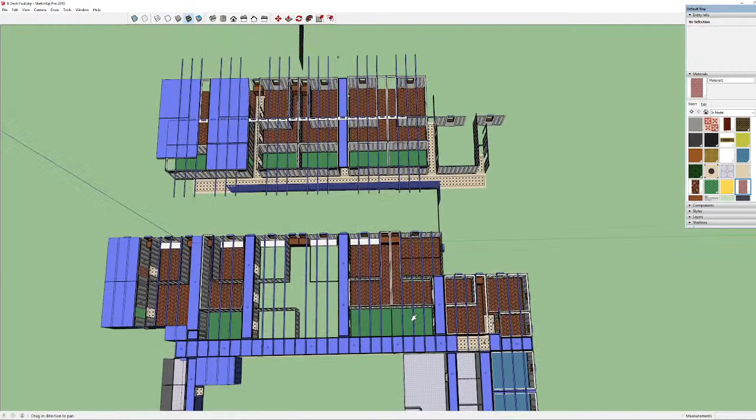And there's also a bunch of electric radiators in first class, but many passengers in second and third class did not have electric radiators, and they had to just rely on the warm air trunks to deliver air. And according to some second class, third class and first class passengers, the warm air delivery did not work properly. I did a Titanic University story about Imanita Shelley, who was in second class and complained that it was ice cold, and she needed a better cabin.

So there were always problems in the beginning with Olympic's ventilation and heating. So it wasn't always the best situation with getting warm air to the ship's areas. But is this the new? This is the old. But indeed, all of third class, all of second class were provided with warm air, including into the cabins. All of the dining saloons, including third class, had steam radiators, so they weren't freezing while they were eating. And this is how they were kept warm.

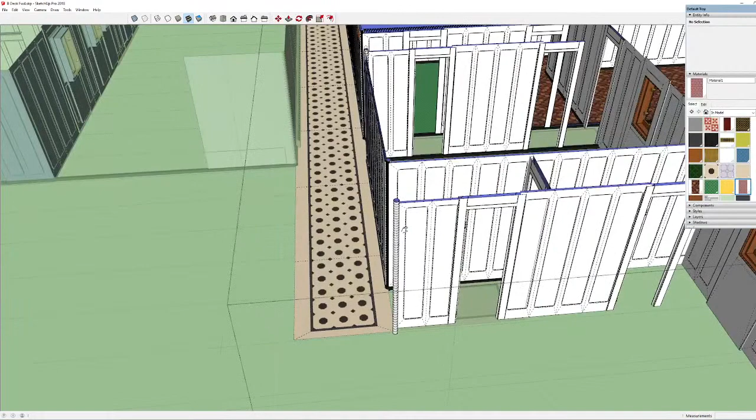But there was no real form of air conditioning. They would use electric fans in the first class dining saloon because it got way too hot with all those light bulbs, hundreds and hundreds of light bulbs. They'd have to open up windows, and if Olympic, because Titanic didn't survive long enough, if Olympic, Titanic's identical sister ship, was in rough seas, they could not open up the portholes to allow for ventilation, and they all were suffering and sweating and stinking up the place in that hot room. So yes, that's how the cabins in the interior were somewhat kept in climate control.

I just noticed this. What deck is this? There's a slight curve in the superstructure. Oh yes, we talked about this briefly earlier. The sheer of the ship, which is a good question. And you can kind of see it right here. We do have a plan to implement the curvature or the sheer of the ship, which, I will quote a Titanic historian, who I do quote a lot when he talked about sheer and how awful it is, is a bitch to implement. That's his exact words, I believe. Sorry, everybody, but we do have plans to implement it.

It's not as noticeable in a lot of areas, which is nice, but we have to make sure it is implemented to fit with the exterior of the ship, at least the upper decks. And the ship really has extreme sheer right around underneath the forecastle and under the poop deck. It's not so noticeable amidships and the lower you get, and you can only really notice it when you're in a long open space like a corridor. If you're in a cabin, you can't really see it because you're just in a square space. You're just in a box and you can't see the curvature of the box. So that is a fair question and a good question.

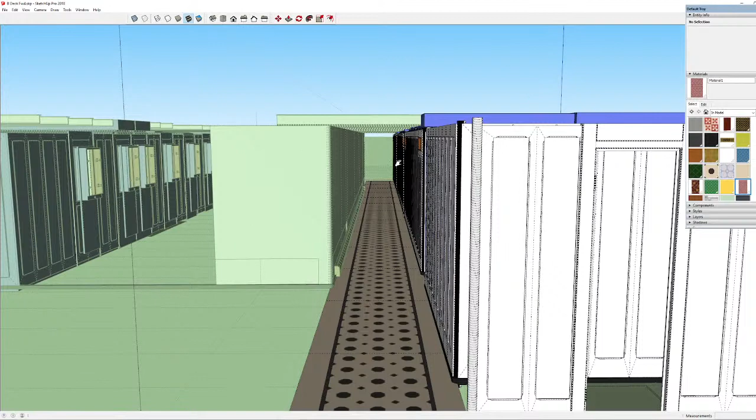That's very soon. THG soon. Probably not. Probably once we are getting close to the alpha release, and this stage is ready to be put into the engine, and the other stuff is being plopped in, and other stuff is coming out, and I'm making sure that all that is ready to go, because after this stuff is all ready to go, kind of, then we have this little piece to go, and then we have corridors that have to be ready to go.

That's my stage of updates for everybody. Because this area right here, we don't do anything to it because it's already been done for a while, which is nice. So then we just have to double check and redo stuff in these corridors because there are changes to the midships corridors, because as you asked too, Derpy, you want to see new images of that.

Is there curvature noticeable on Scotland Road? There is somewhat, and the curvature that's noticeable on Scotland Road is actually already in Demo 3. That's how noticeable, or how unnoticeable, the sheer is that low in the ship, amidships. You don't have anything crazy. I'll go back to my plans again. I think this is F deck. Stop it. This is E deck.

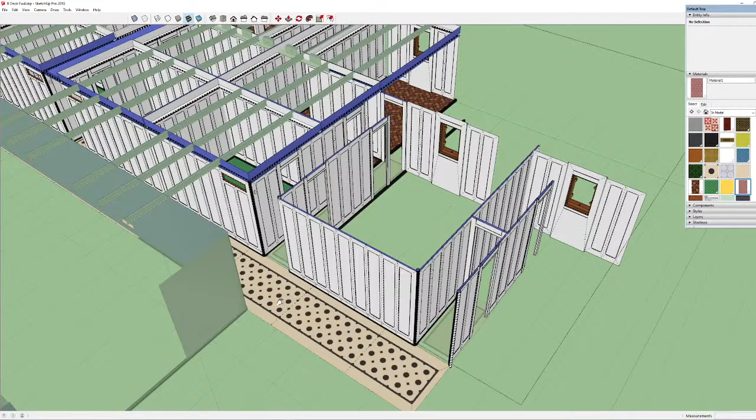Were front cabins wiped out on other decks aside from B deck? Yes, like the officers' cabins. You have those forward ones right here, with these walls splayed out somewhat. If you look at that painting by Ken Marshall of the bridge front of the wreck in 1985 and in 1912, you have the walls of the officers' quarters peeled away, and you have the wheelhouse gone. That's because all this was pushed away from the water flowing in. As the bow's going down, you have water flowing this way as the bow's going this way.

So all this is wood right here, so all that gets pushed out and destroyed, along with this, which is all wood pretty much, and then all this right in here is just left to be pretty much removed and destroyed, because that's all wood. And I imagine they've never explored any of this in here. This all gets pushed back, and that's pretty much all you're left with. And that's what's in there.

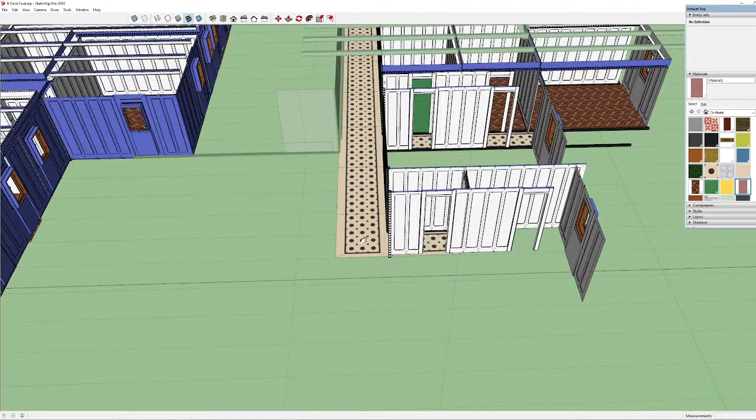There was a cabin in the wreck that still had glass in the... Yes, there was. Which is weird because you have the windows in the reception room and in the dining saloon staying intact and on their hinges, basically, and they're made of somewhat delicate stained glass. And then you have a glass which, I guess when the ship hit the seabed, could have done a little jump and stayed put, but you have parts of the decking. Imagine this is the deck. In places, like the purser's office, which we explored the other day, you have the decking being pushed up like this around the ship.

So you have extreme forces going on around the ship, and then you have delicate areas, almost like nothing's happening in other areas. So it's amazing what forces are at play, and really it's just the chaos and the randomness of it all, I guess you can say.

There was a debate on whether the sitting room of E.J. Smith was oak or painted white wood. Do you know? Greetings from Antwerp, where Rosenbaum lived. Oh, neat. Greetings, Arthur. That's a good question. We're debating it too. We have several. Guys, I'm gonna show you some stuff. Hang on, I don't know if I'll be able to find it. Where is the render of Captain Smith's sitting room?

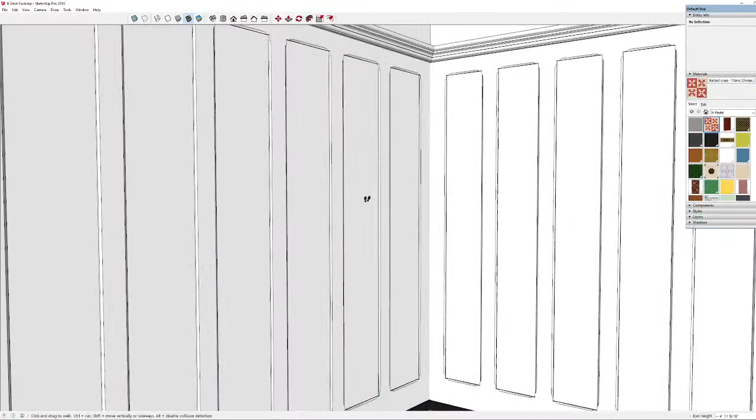This is the pattern on Titanic, is this green or red? Barred cross is red. That I get sick of seeing. White walls, black trim, and a red floor. You gotta love it. That's nothing but Titanic. That's the color scheme of Titanic's interiors. White, black, and red, or just off-white, black and red. So, you know.

So, we'll let you guys know when we know what his sitting room finally looks like. I'm leaning towards white myself. I mean, that's just hard. This matches a couple of descriptions. This matches some illustrations. They both match different things. It's difficult, you got difficult choices. You gotta read between the lines.

I said that last time when we talked about Olympic's auction catalog. You gotta read between the lines, and that's what we have people to do, and that's what I don't want to do. And it's never ending. Luckily with B deck we know a lot about B deck already.

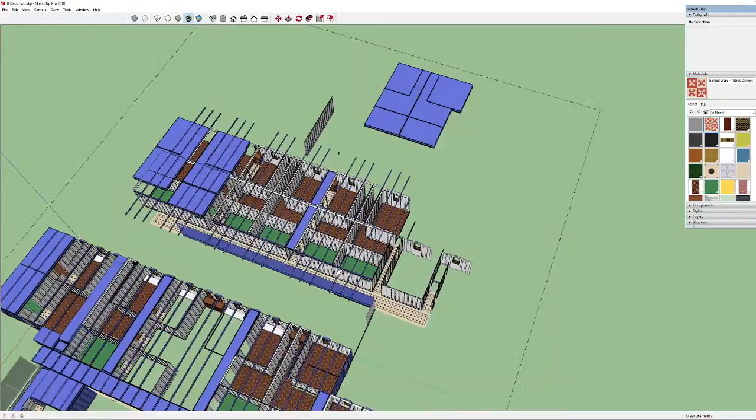So yeah, everything's painted white on Titanic. You know, I was just saying that. Look, everything's painted white. Literally all the corridors are gonna be white or oak. I'm gonna tell Gio to paint that room blue. You guys.

I'm gonna tell you that it's gonna be painted blue, and it is difficult to model the galley because there are so many different pieces of equipment, and oh my God, what is going on here? Is that right? Okay, that is right. There are so many different pieces of equipment that are unique and special and custom for Olympic and Titanic, and this is an unknown space because there's no real Titanic plans to go off of. And no, there's no bathrooms attached to the restaurant. There's no toilets here.

The closest toilet, if you're eating in the restaurant and you need to use the bathroom, you got to walk all the way to this area right here, which is kind of silly. Well, you probably could just go downstairs and then walk there. But yeah, there's a lot of unknowns there, and there's a fish tank. But there's a lot of unknowns here that we're gonna have to create.

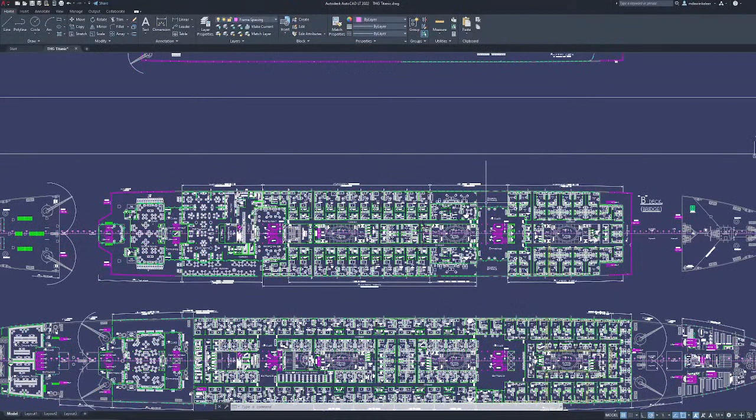Yeah, that's where the fish tank was. That's where we can have that never-ending joke that's almost as bad as the pool on Titanic. I think there were 2 fish tanks on Titanic, actually. Was there a fish tank down here? Oh my God! Yeah, there was a fish tank down here. Okay, so there was a fish tank on B deck, and there's a fish tank down on G deck. So yes, there's 2 fish tanks on Titanic. You wouldn't want to be a fish in either of them because one's pretty much in the breakup zone, and the other one is down on G deck in the refrigerated area, and that's just a bad day.

But I mean, if you're in a crushed space, that's just not... I mean, and you're probably not even the right type of fish to be in the North Atlantic, I'd say. And I think these fish need to be near the seabed, and they can't go down 2.5 miles to the bottom of the ocean to find food.

But yes, there's going to be a lot of modeling developments in the interior. I'm looking forward to getting the interior ball rolling, because there's going to be then just constant zoom zoom zoom of progress, because we already have a lot of the furniture done for all this area. Opening up my folders again. Sorry, I'm looking for it. Here it is. Open file location.

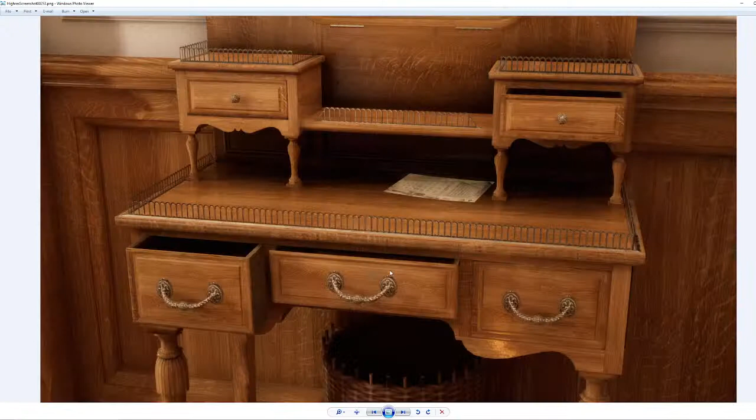When you explored Demo 3, you already saw a lot of the furniture that was used in these simple cabins. Like this wardrobe is in all these cabins. This bed is in all these cabins. This wash basin, all these cabins. This guy, which is a luggage rack. This dresser in all these cabins. We got this. This is not good at all. We gotta change some of that. But yeah, all this is in the cabins already, and we have it, and it just needs some new textures a bit.

But yeah, it's already been modeled and ready to be plopped in. Just a few new things need to be added too. Oh, there's a Pullman berth. We even have that, I didn't know that. So yes, there are a bunch of assets already made, and these cabins will just go right on by. So I'm very excited about that.

So that's why it seems like there's a big lot of the ship that's just gonna take forever, but it's all gonna just go by pretty fast until we get to the period suites, and it's gonna be a while until we get to those standard Harlem style cabins. These are technically called period style cabins, but this is Harlem style cabin B, and it's one of the, I forgot how many, 17 period styles. I already forgot. I counted and put it in a post the other day. But

this style is used quite a bit between unique period style cabins, along with a French cabin style, which is period style cabin A, which is modeled after Louis XV, a very lovely French style cabin, which we don't have. What also should have been Rose's cabin.

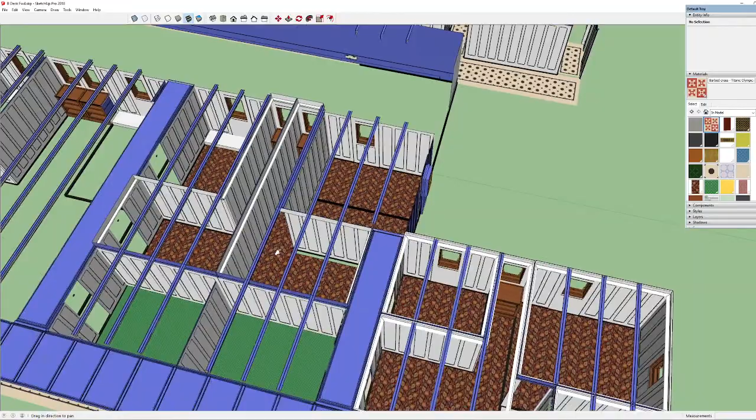And let's see. I don't even know if there were actual live lobsters. I mean, they did have lobster thermidor, I believe, on the menu in the a la carte restaurant, because I've had that lovely book for the last meal on Titanic. I've only made the first class dining saloon meals because I don't want to ruin a lobster meal. I can't do that. I keep scrolling to this.

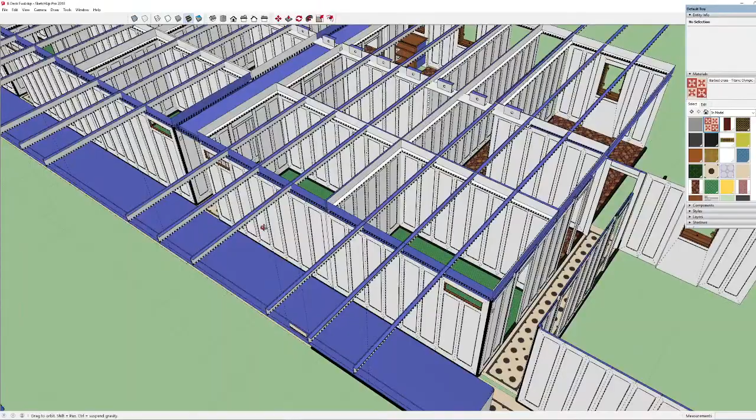I appreciate the support of you guys for coming out, and I hope the next time that we have one, I won't forget the watch. I'll make sure that there's a watch in one of the cubby holes in the first class purser's safe, in one of those deposit boxes, and hopefully we'll have a slip there too with it.